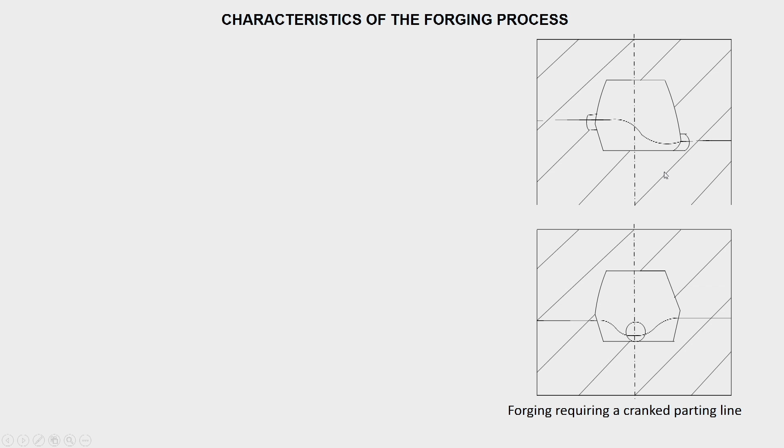So you will find that complexity increases if there is a presence of thin sections, if there is a presence of complicated shape, and in cross sectional area, if there is a large variation. The part shapes that require die parting - if the part has a different parting line, it becomes very complicated, whereas in a simple case it is easy. So when the parting line becomes complex, you will find the complexity increases.

When you come to the role of flash in forging - I have already discussed earlier - the flash is generated due to the closed die form. This flash is basically unwanted material, as I've shown in some photographs earlier, which after the forging operation you have to remove. In most cases this flash material will have a considerable volume.

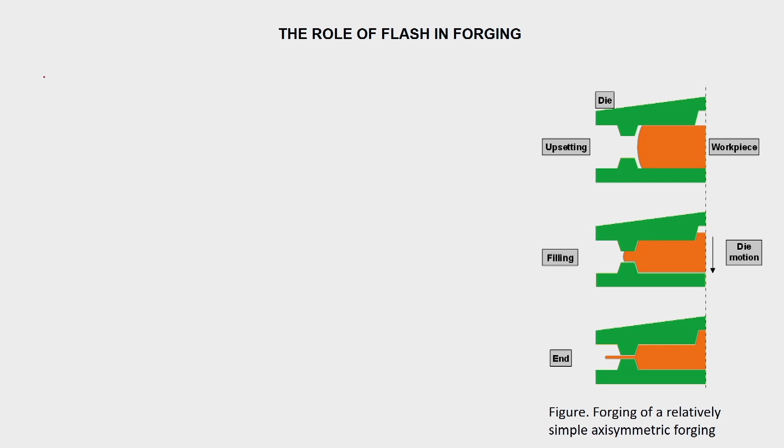The volume of the flash may go up to more than 50% of the volume of the component.

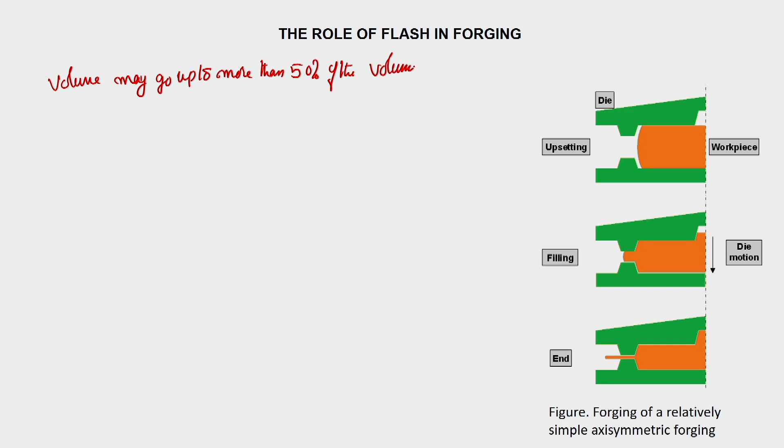In that case, you are going to end up with a large wastage of material also. And the flash which is formed, the more complex the component is, the flash will be larger. So, that is another important thing.

For a simple component where there is not much complexity in the geometry, the amount of flash may be less. But for a large component where the complexity is very large, the flash required will also be very large. The control of flash formation is very important, because you need the flash, as I mentioned in the last class, since we cannot cut the raw material exactly as required. When you heat it, there will be some scale losses and other things.

So that also has to be taken into account, so you may have to have some extra material. Next, flash acts as a cushioning effect, taking much of the impact when the forging is taking place, because the two die surfaces will not come in direct contact. So that way it is safe for the die.

Third, if flash is not there, the entire die filling may not be complete, so sometimes underfilling may take place. Sometimes there is overfilling, and if it is there, you have to remove the excess material, which also comes out in the form of flash. So flash is necessary, but the flash volume should not be very large. You have to have a minimum amount of flash.

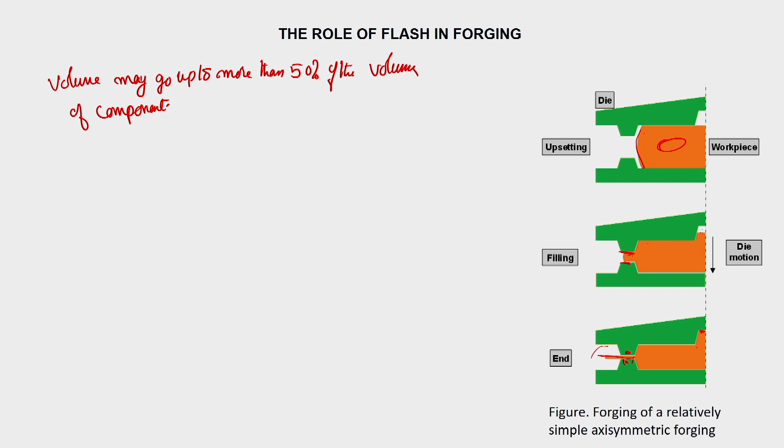Now, when you look at that, you can also see how this affects the forging load. I have discussed this, but I will think through it once again. When the die contacts the workpiece, the forging load increases with the forging stroke. So you may find that when the dies contact the workpiece at this stage, the force starts building up, and somewhere it goes constant - it is a homogeneous deformation which is taking place.

Of course, some amount of frictional force is also present, but if you assume it is a well-lubricated piece, it remains like a constant thing. From somewhere, flash formation starts, and it touches the die surfaces, and at that time you will find the load keeps on increasing.

The load keeps increasing because extra force is required for deformation of the flash. As the height keeps decreasing, the load increases. In our derivation, we found a direct relationship with the thickness, so as thickness decreases, the load keeps increasing until the die is completely filled, but this can be controlled by stroke adjustment.

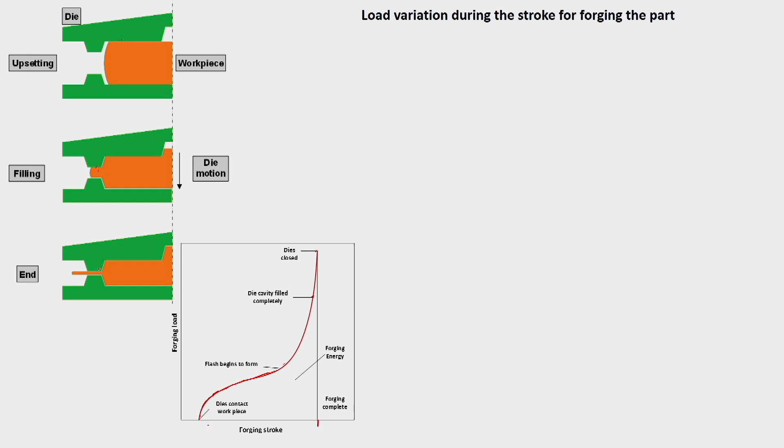Towards complete die closing, you get a very thin flash, and the extra material has just flowed out. Here the pressure increases very much, and for the metal to squeeze or extrude between the die faces, the forces required will be very large.

You cannot avoid flash and flash gutter in an impression die forging, so selection of appropriate levels for the flash land geometry, that is the gap and the width, is very much necessary.

External and internal draft angles are required, otherwise it may be difficult to eject the part. After all this, the flash is trimmed out, so you need to put it into another die for this purpose.

The flash land and gutter are important, because if excessive flash land is present, excessive material will be lost. But if it is less, complete die filling may not take place. So you need a good idea of what geometry is crucial here.

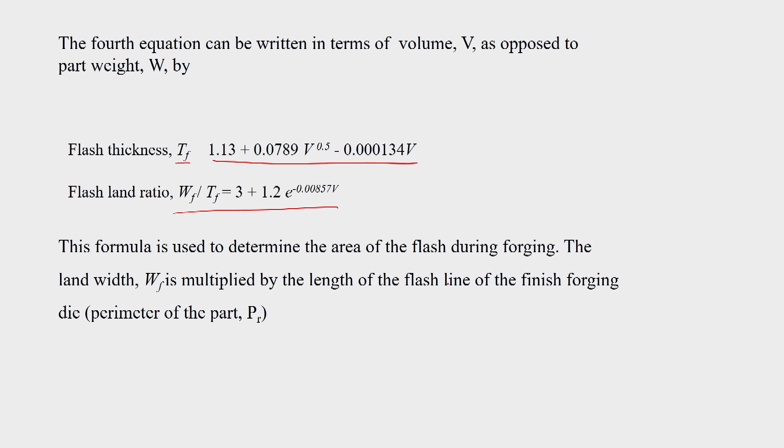And so, flash thickness equation in terms of volume you can get this, and flash land ratio in terms of volume. So this becomes very simple. The land width WF is multiplied by the length of the flash line for the finishing forging die, that is the perimeter and other things. So that way it is used.

Now, amount of flash, as I mentioned, may sometimes go to very high value also. The cost of the material in forging is determined by the weight of the finished forging, and if there is material wastage, then your cost of the forging will go very high. So this loss of material can be in terms of flash as well as in terms of oxidation, if hot working oxidation is taking place. So that way it is there, and you see that for simple alloys it is okay, but for very costly alloys this becomes a real problem, and in costly alloys forging also becomes difficult.

So, you have to have the minimum of material loss, that is from the flash produced during forging, but further losses may occur due to scale formation for material that oxidizes significantly during heat treatment, for hammer forgings due to bar ends and so on. In hammer forging you have to hold it at one place and then hit it, so that way also you end up with the loss of materials. So there are a lot of these losses.

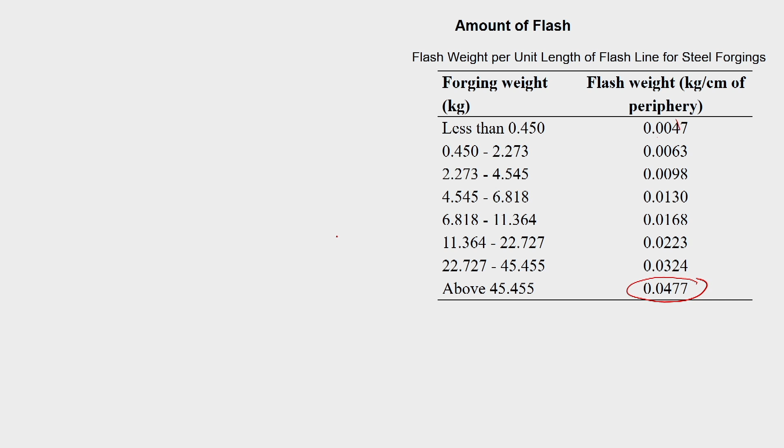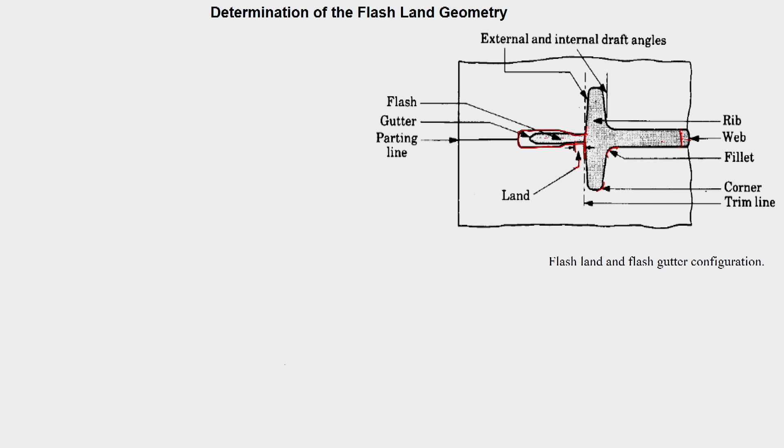Now, when you are designing for the flash, there are webs. See, when you look, you see that web is there. This is a piece which is there, maybe it may be a flywheel or something. So web is there. These webs are thin sections, you know that. Webs are thin sections.

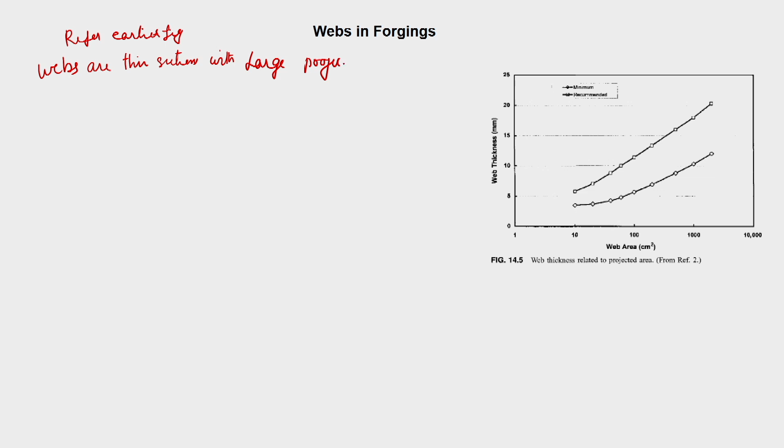So refer to the earlier figure. Webs are thin sections with large projected area in the direction of die closure.

These webs are designed into the part for strength, and maybe other reasons, maybe you wanted to connect the rim with the hub. So that is the only way by having this web, and usually these webs are thin, very thin, and when it is thin and the outer rim is very thick, then you have a lot of problem. These webs add considerably to the load, and you will find that the major area taken is due to the web rather than the component.

If it is a flywheel, the maximum area is taken by the web, not by your rim or by the hub. So because of this, it adds considerably to the load requirement during forging operation, because of this die contact area, and once it is thin and its area is very large, your forces has to be very large.

So if the finished part has through holes to be forged in, then these must be filled with webs at the die parting line. So that is another problem. Many times in the web also, to reduce the weight, people may put some holes also, then it becomes much more complicated. So material in these webs is additional waste material and adds to the material cost per part.

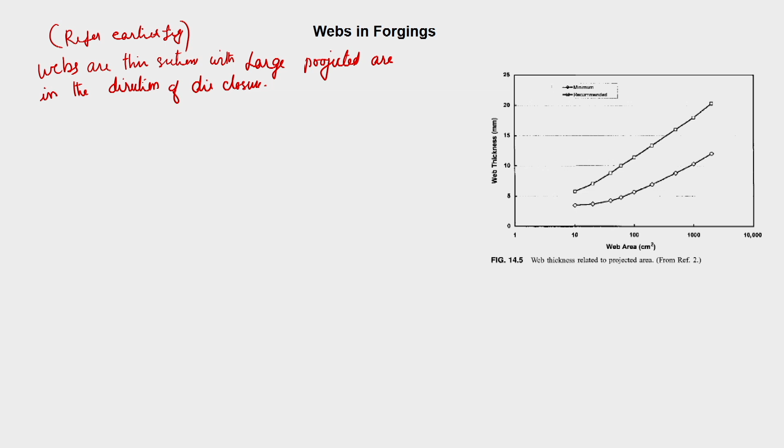So you can say that the approximate thickness of the web, web area into web thickness, there are certain things from experience, from literature, we can get this information. The appropriate thickness is dependent upon the projected area of the holes to be filled. So the web thickness we can get with this simple relationship. These are all from experience.

Now another important design consideration is the allowance. Your forging finishing operation will not be exactly as what you wanted, because in the forging die design you have to provide allowances for many things. One is machining allowance, next is your draft allowance. There are internal as well as external draft allowance, otherwise the material will not come out of the die. Then you need allowance for radius, then you need for fillet radius.

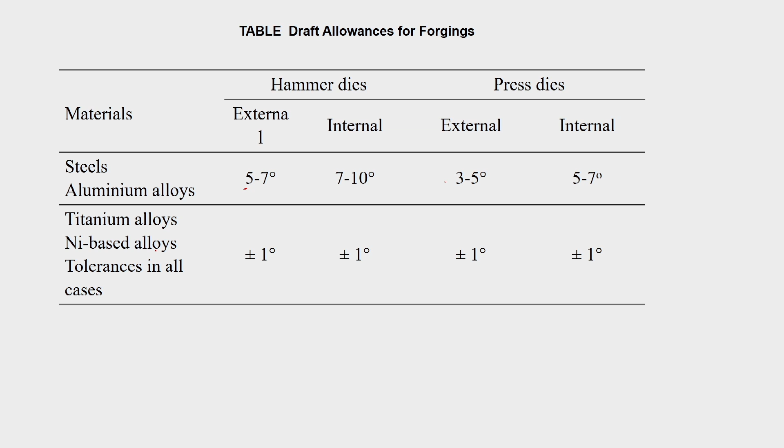Internal draft angles provided are always higher than the external draft angle. For steel and aluminum alloys in hammer die, the external draft allowance is 5 to 7 degrees, whereas for internal surfaces the allowance is higher, 7 to 10 degrees. Similarly, in press dies, external is 3 to 5 degree, whereas internal is 5 to 7 degree. So internal is generally higher. For titanium alloys and nickel based alloys, tolerance is plus or minus 1 degree, because those materials are difficult to machine.

Now we have to look at the fillet radius. If you look at this, two types of radiuses are there: one is the edge radius and another is the fillet. Fillet is the internal part, there you have to provide radius, otherwise metal will not flow smoothly.

The edges and corners in the part must have radii added to them. These radii are necessary to aid material flow and ensure good die filling. If the radii is not provided, the metal flow direction will change, and you may find it is not filled properly. Even if excess material is there and it fills, you may end up with defects, because metal will come and join, causing what is called a lap.

So for that you need a smooth flow of the metal in the plastic stage, and liberal radius are required. Also, if sharp corners are there in the die, that will result in stress concentration, both for the die and for the workpiece material. The design engineer will want a liberal radius, but a liberal radius means more material will be used, so this problem will often arise along with the stress concentration effect.

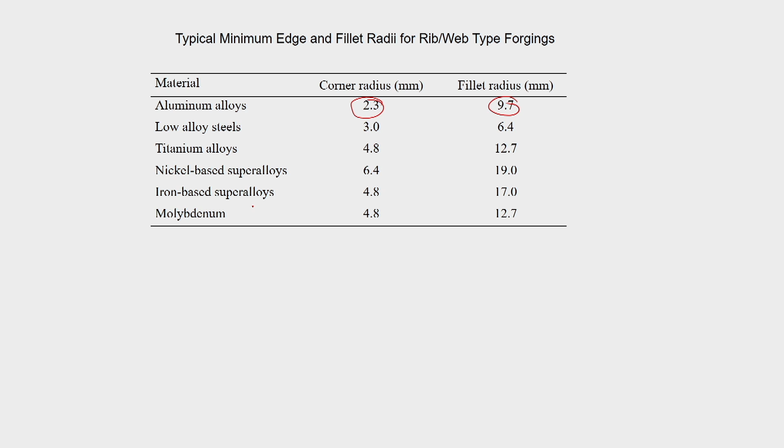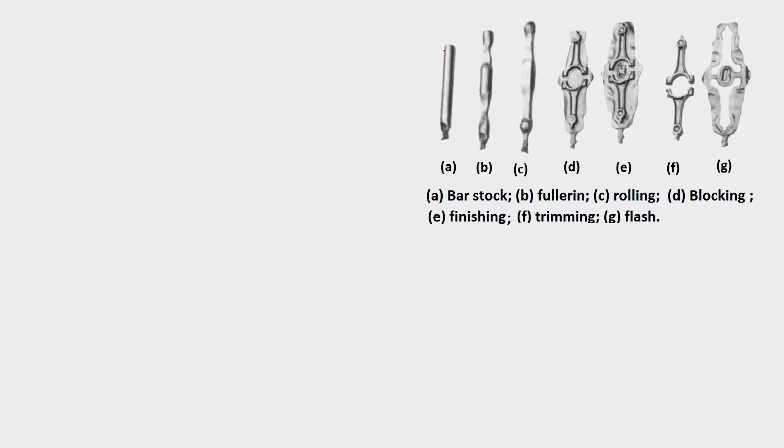Now, as shown earlier, very few forgings are produced in one stage. This figure shows the case of forging a connecting rod. In the first stage you have a billet in cylindrical form. Then you subsequently do many operations, like fullering, and then you may have to reduce some section with a partial rolling operation. Sometimes splitting operation will be required, sometimes punching also may be required.

Unless it is a cylindrical piece or a square piece, a very simple case, it will not be a problem. But in most cases where the component is to be deployed as part of an engine or machine, multiple preforming operations are required for impression die forging, and these are necessary. The final operation is called the finisher operation, and the one step before the final operation is called the blocker die.

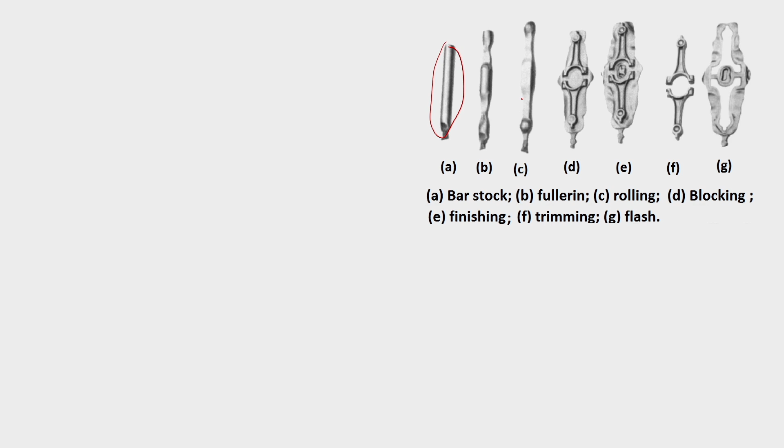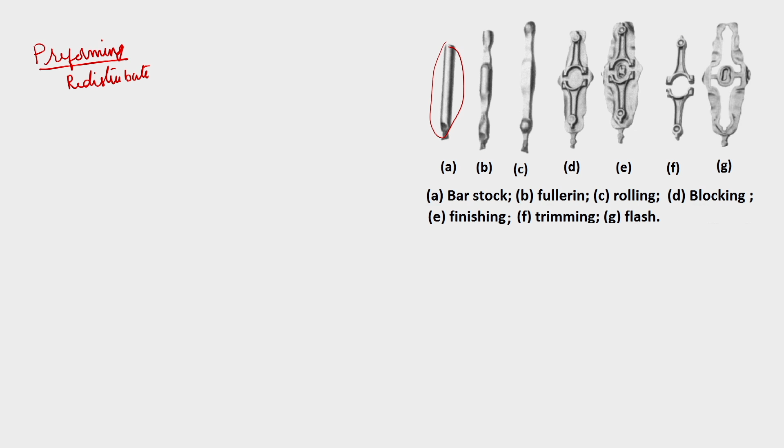The starting point of the forging is a very simple shape, either a length of round or square section bar, a billet cut off from the bar stock. The object of preforming is to redistribute the stock. So the preforming operation is to redistribute the material to correspond more closely with the finished shape.

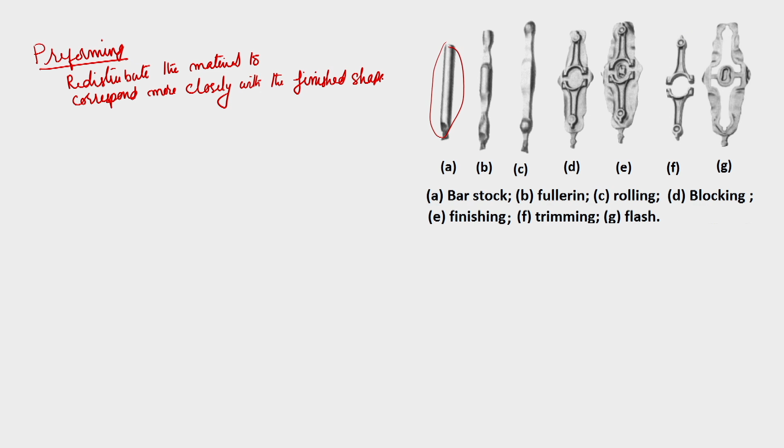And the design of this preforming dies is another thing. There is no set of standard rules for how to do it. So it all comes from the experience of the forging die designer. So that is another important thing.

But when you are designing it, you have to take care that the metal is flowing with least resistance and complete die filling is taking place. So it is a sequence of operations which takes place.

Progress has been made recently, you will find a lot of finite element methods, and CAD/CAM packages are there, where you can just design this preforming dies in a very simple way. So that type of advancement has taken place.

Most of the flat or compact forgings start from the billet and can usually be produced in 2 to 4 forming stages. The first forging stage is a simple die, which may be a flat face called the scale breaking die.

When, because if it is in the hot condition, you are taking it from the furnace, almost all metallic materials will have an oxidized layer. Even if it is steel, it will get rusted. Taking it from the furnace you cannot scrape it off. So what they do is put it between a flat die and give a small impact, so that the scale gets separated and falls off.

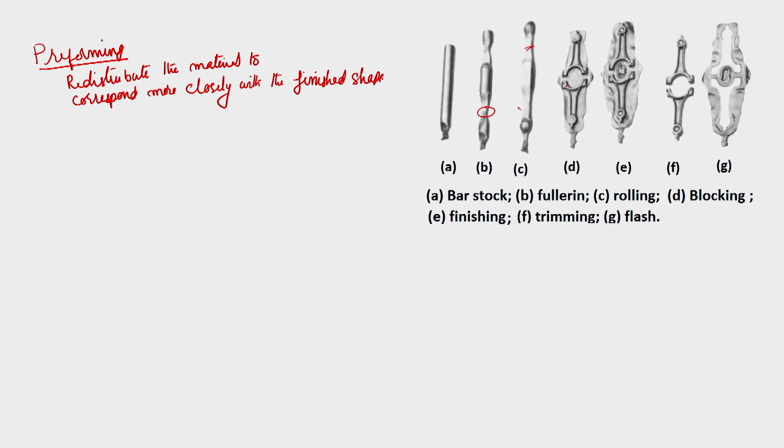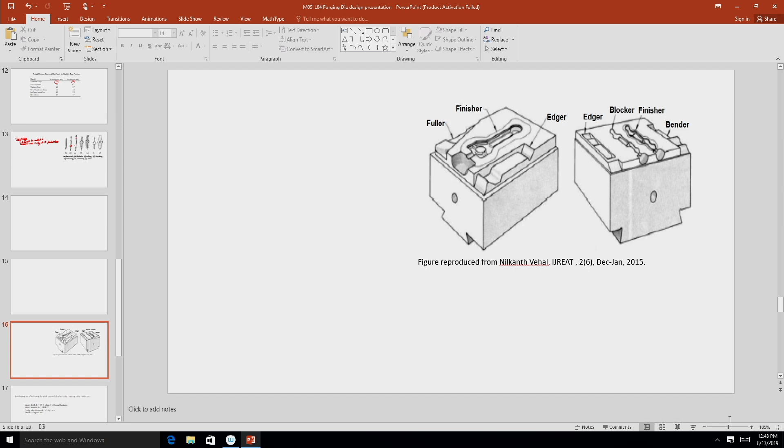That many operations are carried out. So, if you look at the blocker sections, the blocker and the finisher, there is not much difference. Only a very small difference is there.

The blocker is designed such that in the finishing die, the minimum amount of metal flow is taking place, only what is just sufficient, because if the dimensions go out in the blocker die it will not matter, but in the finishing die the metal flow should be minimum. If large amount of metal flow takes place in the finishing die, then after a number of forging operations, you will find wear taking place, the die's internal surface gets worn off, and the material will become out of tolerance.

Once it is within the out of limits, your rejection will come. So, always see to it that in the finishing die the minimum amount of material flow is taking place.

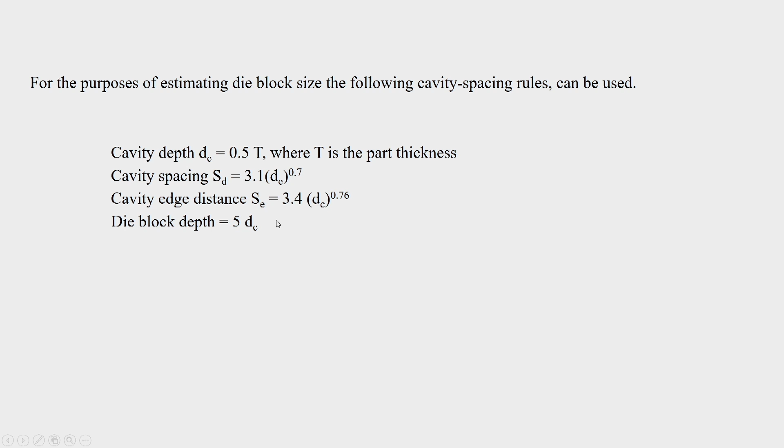So, for the purpose of estimating the die block size, the following cavity spacing rules can be used. These are all thumb rules. Cavity depth dc is equal to 0.5 t, where t is the part thickness. Cavity spacing between the two die blocks is 3.1 into dc, and that is the die cavity. Cavity edge distance is this distance. So, you have this type of thumb rules which are generally used.

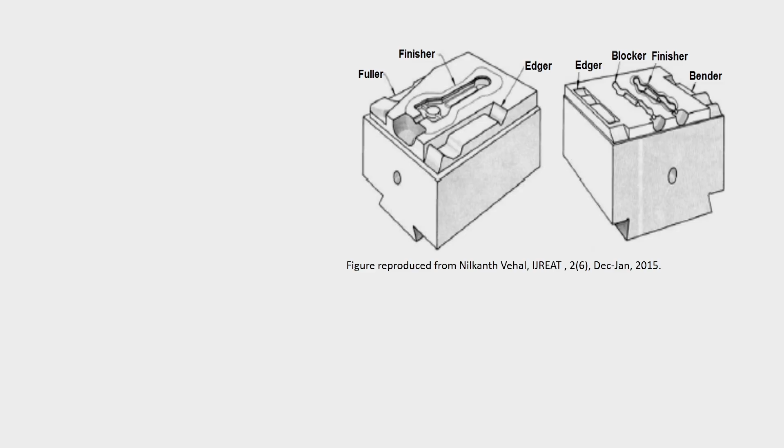If it is very large, then your die block will be very large, so your die cost will go exorbitantly high. But if it is very less, then the die strength also has to be considered, so minimum distance is to be maintained. This gives an idea, it is a trial and error type of thing.

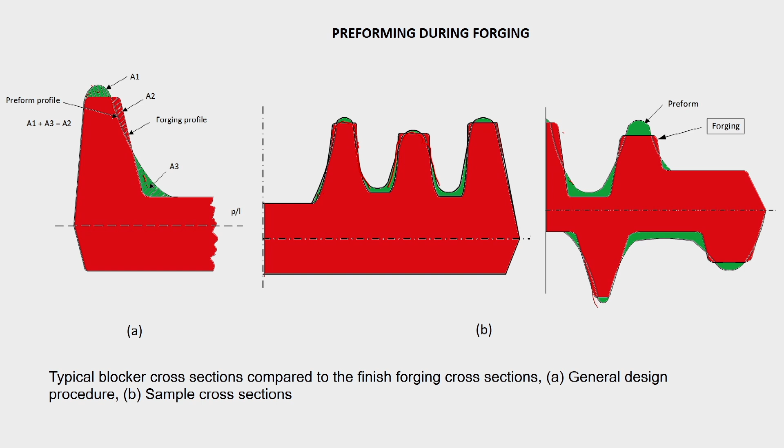So, choosing the parting plane is a very important thing in this die design. The first thing one has to look at is how your parting line should be for the die block. Basically, this is with respect to the finishing impression die and blocker die. In other cases, it will not matter much, because die shift and other things should not take place. So there are certain things to look into, and you have to very carefully make the layout of the die.